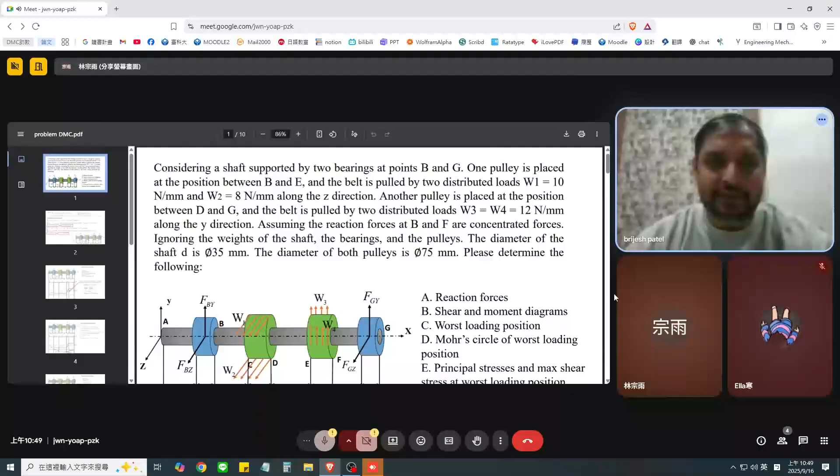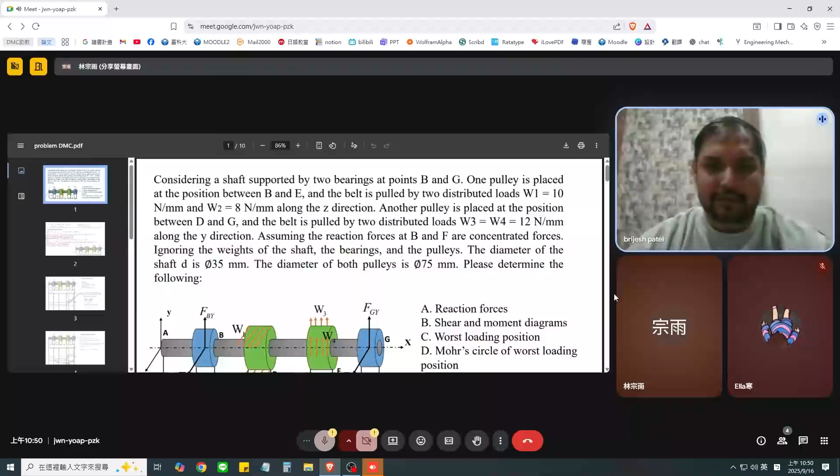So there is a point, the pulley between B and point E. Maybe you can put it a little upwards, a bit to the upside. Or maybe you can just make it small, it's in a small size. Oh, yeah, that's okay. That's all, that's all. I think first page, only one page. So let them start writing the question. That's good.

So there is a pulley between point B and point E. This pulley has two distributed loads: W1 is 10 Newton per millimeter, and W2 is 8 Newton per millimeter. And there is another pulley in between E and F, G, that is of green color, which has a distributed load of W3 and W4, equal to 12 Newton per millimeter along the y direction.

The pulley here is along the z direction, and here it is along the y direction. So there is a z direction and y direction. The loads are acting in two directions, and the central axis is in the x direction.

So assuming the reaction forces, because the bearings support this shaft, and the pulleys are in between these two bearings, and the shaft is elongated till point A, the reaction forces will be at point B and point G. There are two concentrated reaction forces.

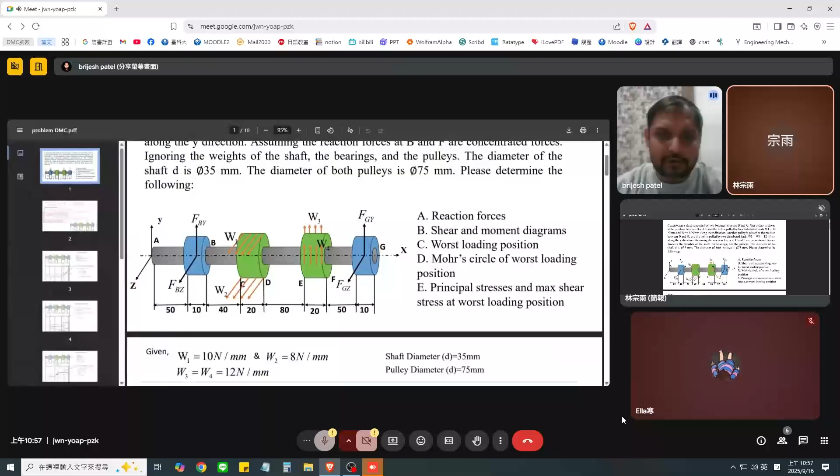No? Does the diagram match? So let's check.

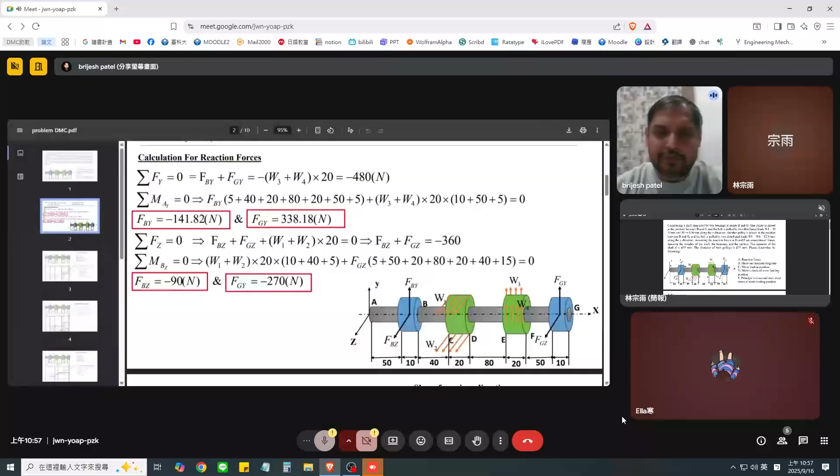First, you have to calculate the reaction forces at F. Ready. There are 4 reaction forces at the bearings. Patel, please wait a second. Yeah, okay.

Let's calculate. Professor, whenever you are ready, just tell me to check the answers. Professor, may I ask you a question?

Does the diagram match the exercise explanation? Because the first pulley belt says that it's between B and E, and in the diagram, it looks like it's between C and D.

The pulley is between C and D, where there is W1 and W2 as the load on the pulley. Yeah, this one is between B and E. This one is in the Z direction. Yeah, here it is in the Z direction. Oh, this one.

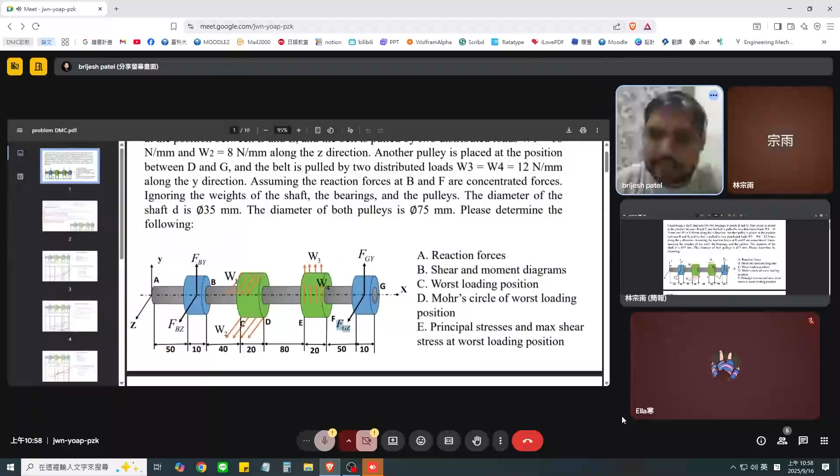There are two distributed loads. One is in the Z direction, and in this pulley you have to consider the loads. Both are the same, 12 Newton per millimeter in the Y direction.

So when you are calculating the reaction forces, if the force direction is in Y or Z, you have to check. When calculating in the Y direction, you eliminate the Z direction loads. Is it clear?

Sir, your internet is worse now, I cannot see the screen. Okay. It's okay now.

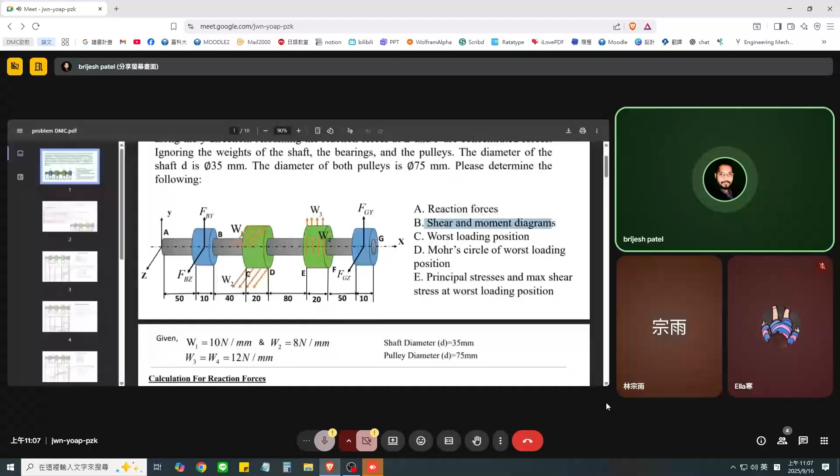So now let's simplify it. The professor calculates by continuously taking X and calculating throughout the beam. I taught you a simpler way to treat it. So first you have to make a shear force in the Y direction. So you calculate the shear force in the Y direction. Make your beam a simple line, make it a load diagram.

So it's in the Y direction, it's a point A, point B, where this force in Y - we are calculating the shear force in the Y direction. So the force acting in the Y direction is force By, acting upwards. As C, it's D - actually we are treating it as supporting the load, maybe from any side.

From E to F, in the Y direction, we are getting W3 and W4. W3 and W4 total load will be 24, because it's 12 plus 12. We already know that W3 equals W4 equals 12 Newton, so we consider it as 24. And here, FGY.

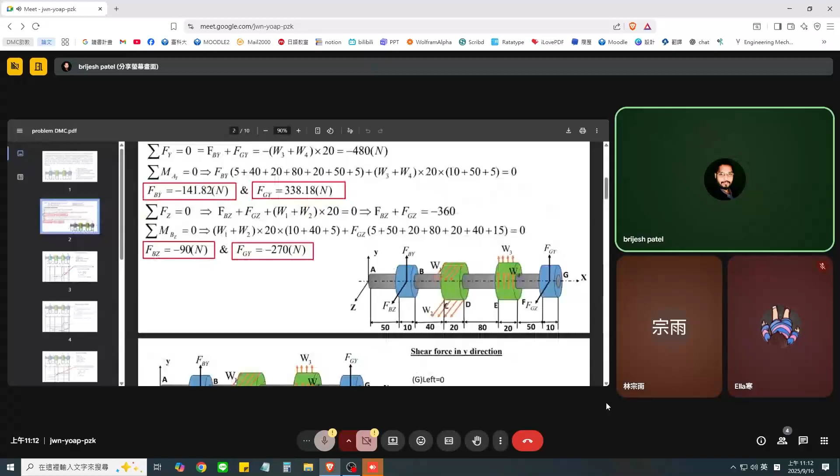So it will be like somewhat here. Then we calculate the load at F, so F will be 338 here at the F point. And 24 into 20 is the total load here. And it's not F actually, it's at the E point.

It will be at this point, and you will get minus 141.82 Newton. So here this inclined line, or the elevating graph, will be in the downfall, where we can understand the reference point at point O, maybe the shear force will be 0. This O point is very crucial because it has maximum bending moment at this O. Where the shear force is 0, the bending moment will be maximum.

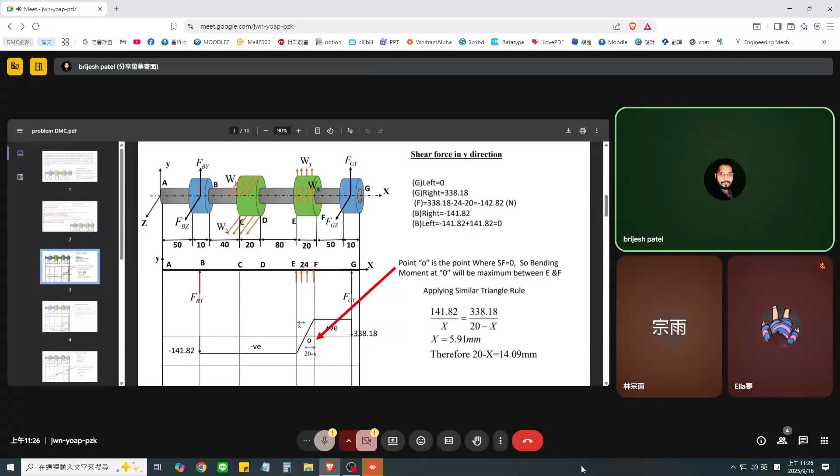Now you can check the bending moment at point G is 0. The bending moment at point F is minus 18.56 into 10 power 3 Newton millimeter at this point. Then bending moment at point O: already we calculated the distance of O from either side, F or E. So bending moment at point O we can calculate through the distance, which we calculated from similar triangles. You will get 20.98 into 10 power 3 Newton millimeter.

And then bending moment at point C, we have to calculate 9.2179. Then the bending moment, actually it is in the center - I made some mistake - this will be in the center at point D. Then bending moment at B will be 0. So everyone got this diagram?

So the maximum bending moment in Y direction will be at point O, where the shear force will be 0. So the maximum bending moment will be minus 20.98 into 10 power 3. Did you get this? Wherever the shear force changes sign or is 0, the bending moment will be the maximum.

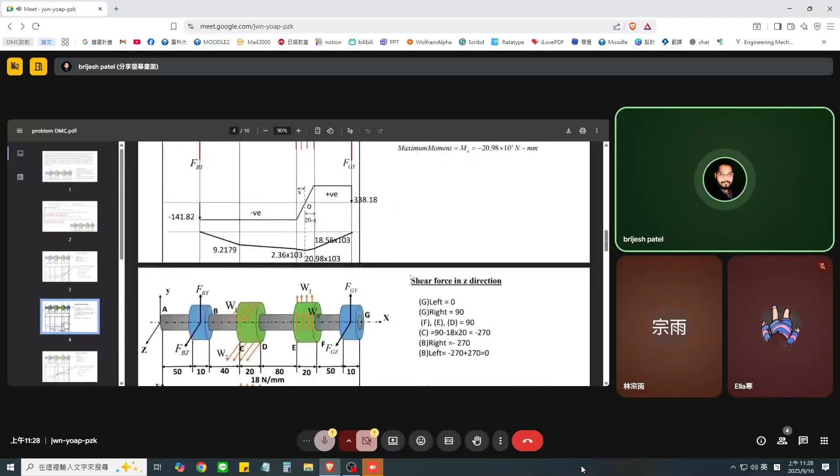So now all of you calculate similarly the bending moment and shear force diagram in Z direction. I will not show you, you do it yourself. Just I will show you the glimpse, like in Z direction you have to calculate the bending moment and shear force diagram. Is it clear? Yes, okay, thank you.

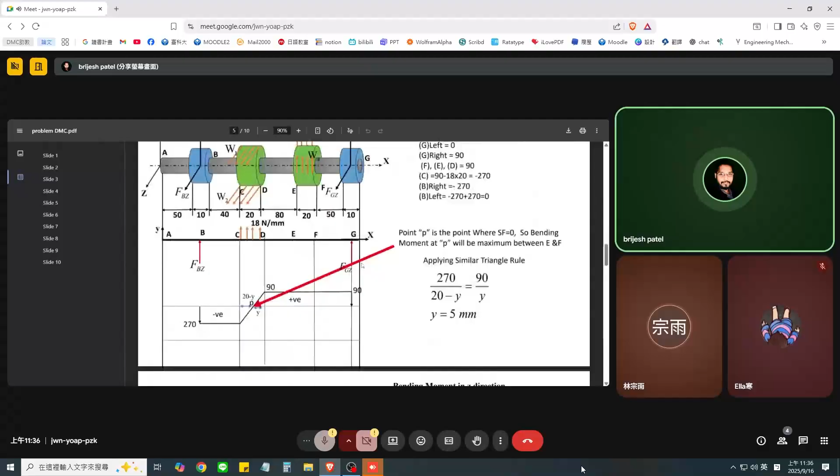Now you have to calculate the point P distance, because at P we know that it's the point where the shear force is 0 and the bending moment at P will be maximum in between C and D. By applying the similar triangle rule, 270 divided by 20 minus y - where earlier we considered x, so we have changed the symbol to y here - so 90 divided by y. The y distance from the D point we get as 5 mm. So from D, at this point, 5 mm will be the maximum bending moment, and the shear force will be 0.

So check the answers for bending moment at Z direction. Everyone check your answers for the bending moment for the Z direction. Yes, okay. Have you got the same answers?

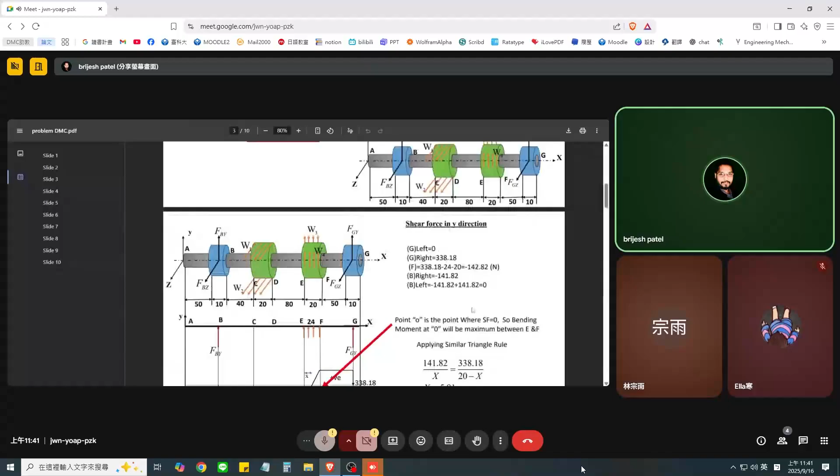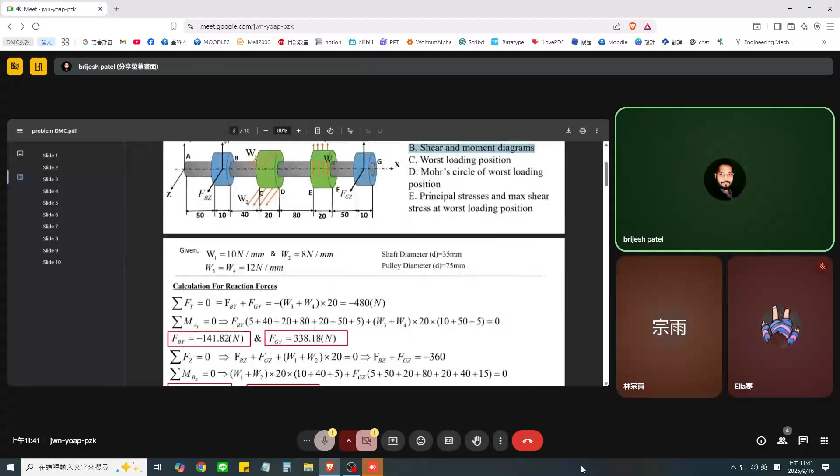So now these two points are clear. The reaction forces we have to calculate initially. Then we have gone for shear and bending moment diagrams in both directions, that is Y and Z, because the loads are acting on both directions. So these two questions in the problem have been solved. Also, we have found out the point at which the bending moment is maximum, and this both the question given.

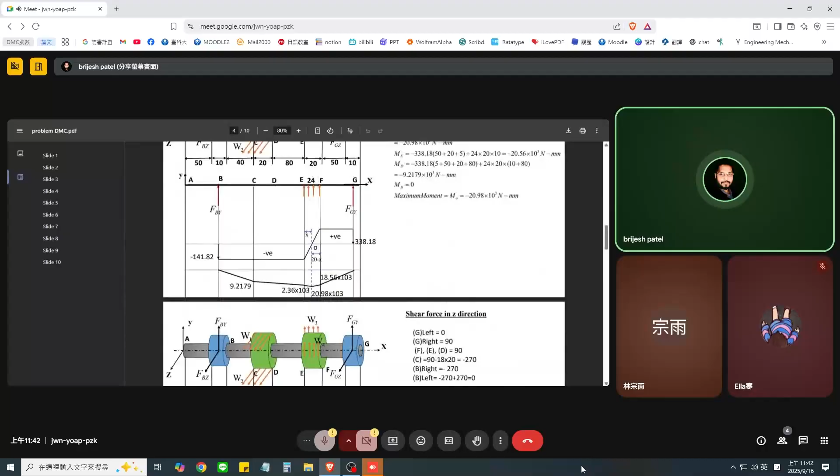So now the problem is, whenever we are calculating in the Z direction, there is also influence of load on Y direction towards it. So we have to calculate at the point, suppose at point O, the influence of Z direction, the maximum bending moment at O point due to the Z direction, and we have to calculate again at this point P, the maximum bending moment at P for Y direction.

Is it clear? Yes. As there are 2 points, so we have to calculate 2 maximum bending moment points. So because the pulley in different directions can influence either of the different directions of Y and Z.

So from the bending moment direction in Y and Z, when we are calculating X equals to 5.91, that is in Y direction, so the distance from point O from A. So I'm calculating every distance, bending maximum moment point distance from O and A. So we know that O is here somewhere between the pulley E and F, in between pulley E and F. So the distance from O to A is 205.91 mm.

So when considering point P in Z direction, the distance from point P from A will be 115 mm. So now I calculate all the moment, maximum moment through these two values of OA and PA.

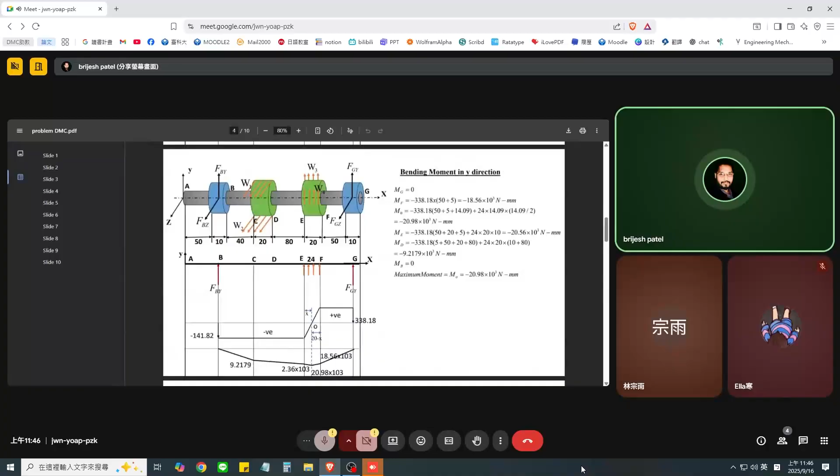See, we are calculating, again I am stating that we are calculating at point O, but not for the Y direction. We are calculating at point O for the Z direction. This point, the bending moment at point O for the Z direction. So this is the calculation. Is everyone clear?

Yes. Okay. So the next part, again at point P, which is at a distance from A, that is 115 mm. So now at point P in Z direction, already you have calculated minus 14.175 here, at point P. So no need to calculate it again, just write it down.

But what is the influence of point P on Y direction? So Y direction loads on point P. So we have to calculate again the maximum bending moment at point P, but in Y direction. So this is the calculation. So everyone calculate it and check that the answers are the same.

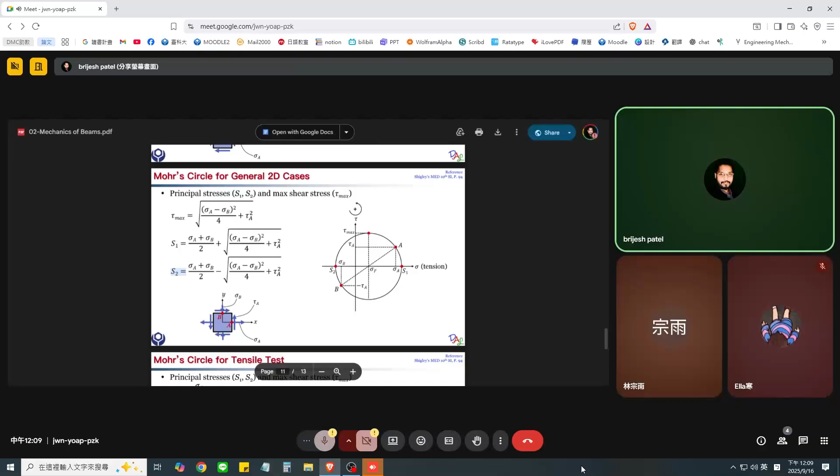So we have calculated S1 as 5.198 by 2 plus tau max value, and we got 5.2 as the first principal stress. When we check, it's similar to the maximum bending stress or the normal stress, meaning the value is the same, almost similar, and the principal stress S2 is almost equal to 0. So now we can consider tau max, S1 and S2, and draw the Mohr's circle diagram. Everyone kindly draw the Mohr's circle diagram.

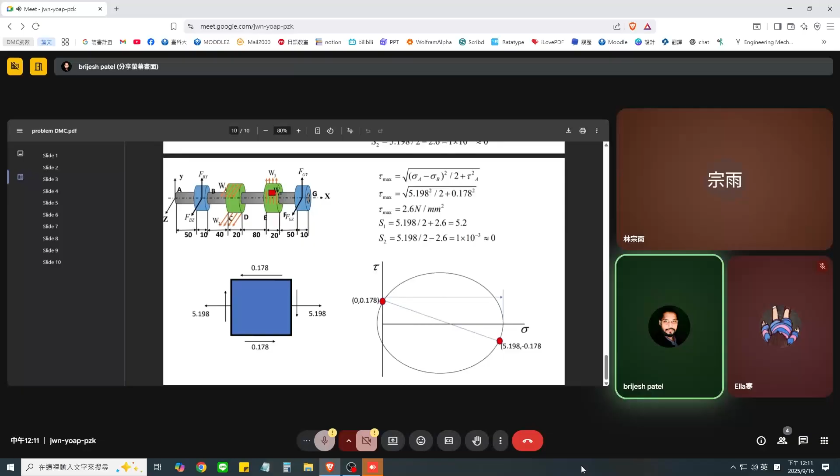I'm sharing you one more problem, just note it down. It's a simple problem, not a 3D problem, so it's very simple.